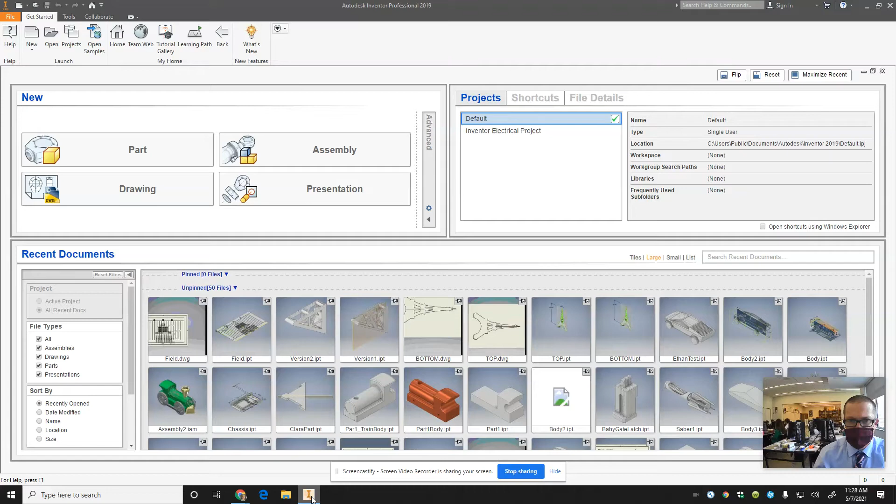All right, I'm going to show real quick how to go from your truss into Cura and kind of run through some of the basic settings to play with. So you're in Inventor. All right, you go File, Export, CAD Format. All right.

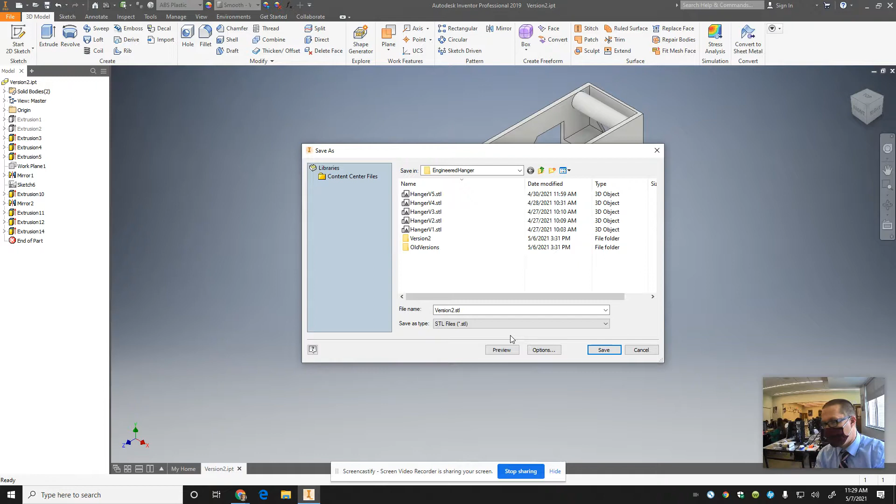Then you go down here to save as type, and you want to export it as an STL. Now, you want to check and make sure that your settings are right here. Most of you are probably all set, a lot of you, if you're on the same computer, but we've had a lot of shuffles. So the first time you export an STL file from the software, you got to check this. You go to Options over here, and then you've got to change the units to millimeter.

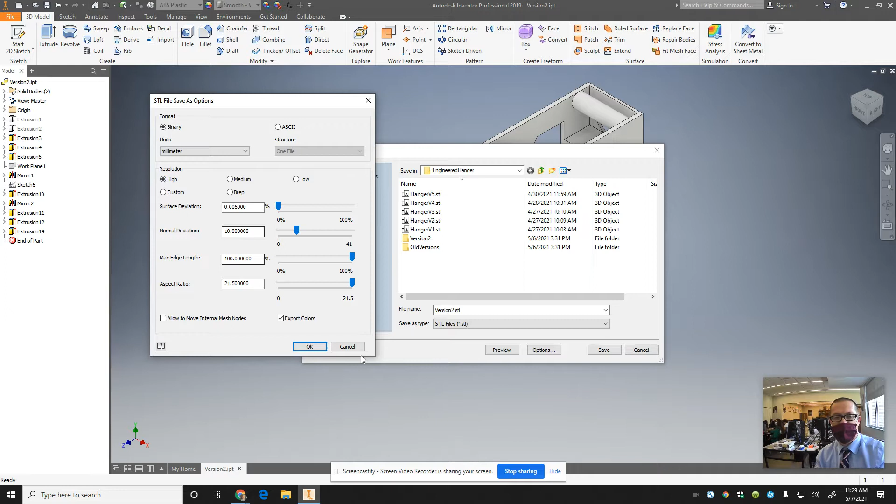You have to change to millimeter, and then as far as these go, I put it on high quality. There are situations where I don't want it on high quality, but something like this, it's fine to export it at high quality. You just hit OK. And then you save it. And save it somewhere where it's going to be easy to access.

All right, I'm just saving it in the folder where I always save stuff. This will be version 6 of that I've exported. All right, version 6. And hit save. All right, so now once you've exported it, you check those options, make sure it's STL, make sure it's in millimeters. Now you got to bring up the print software.

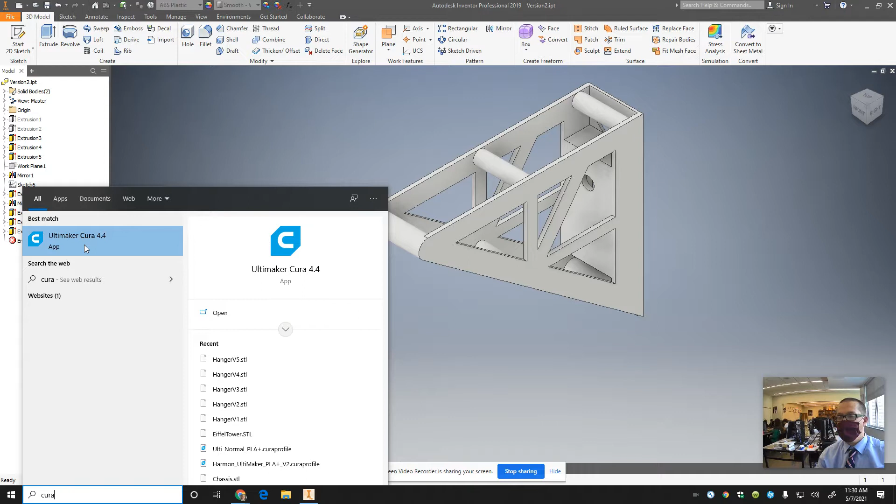So we use Cura, Ultimaker Cura 4.4. All right, so I just go down to the Windows search bar and type in Cura. I find it. If you're a full remote student, you should probably install this software at home on your computer, Cura, because then it'll allow you to see how much it's going to weigh. And these numbers are pretty darn close, actually. They're really not that far off of reality in the end. Because it knows the volume of material it's gonna push out.

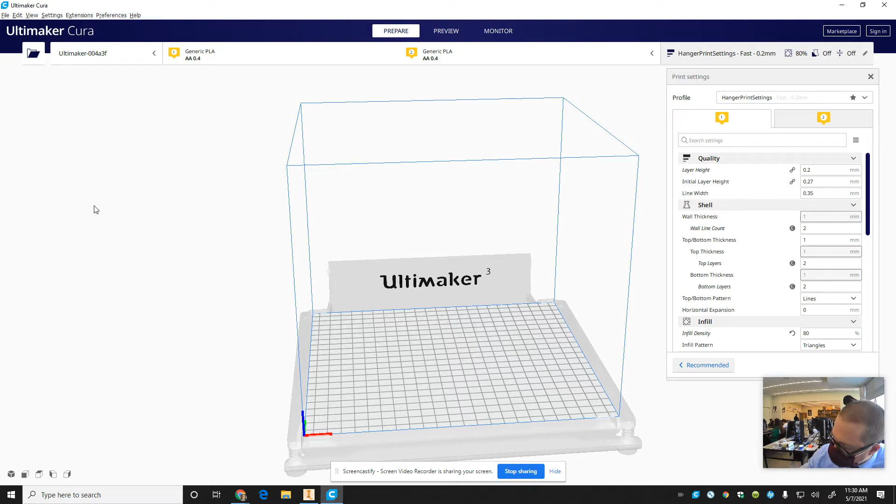All right, so when you first open up Cura, you're gonna see some pop-up windows, and just hit agree and next and next and next, and finally it'll want you to add a printer. All right, and when you go to add a printer, you get a window that looks like this. For some reason, I think some sort of security setting on the network changed. We can no longer find the Ultimakers on the network. So I click Add Non-Network Printer.

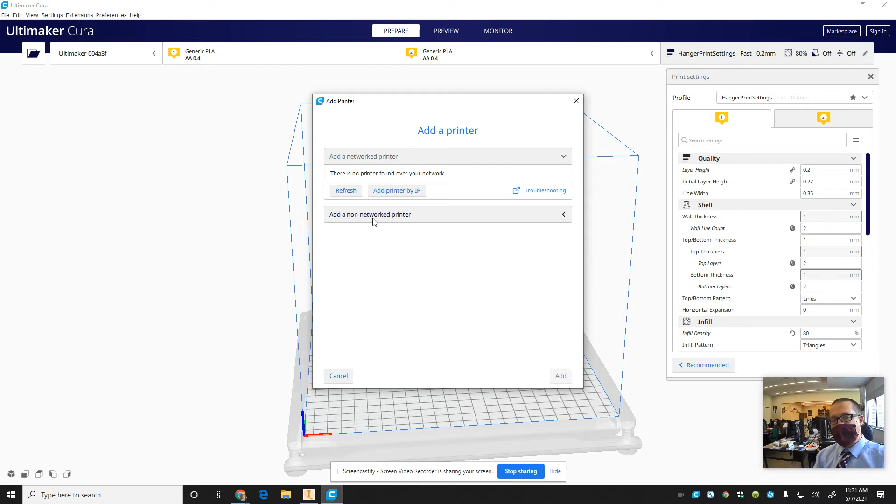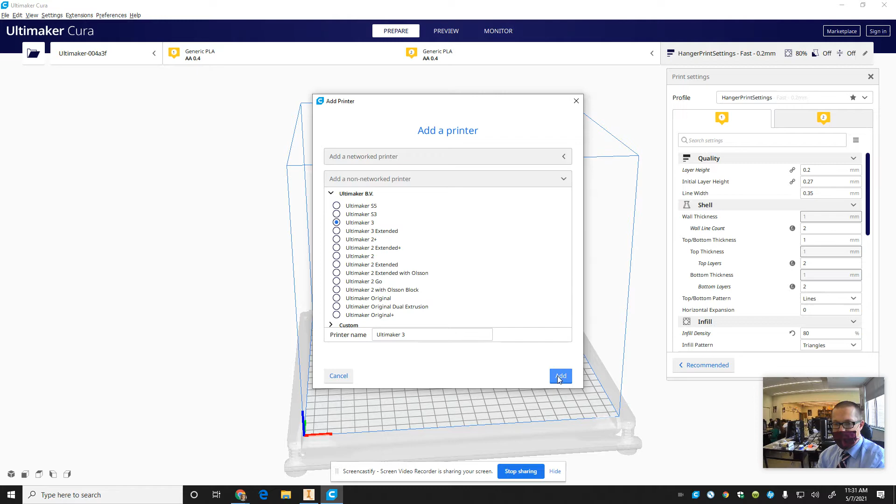The main ones we use are the Ultimaker 3, and then down here under Creality 3D, the Ender 5 and the Ender 5 Plus. The Ender 5 is the smaller one, the Ender 5 Plus is the bigger one. So I'm just going to pick one of the Ultimakers here. All right, the Ultimaker 3, because that's the one that's available right now. I'll hit add. You might have a pop-up if it's one of the others. Just hit next, and it brings you here.

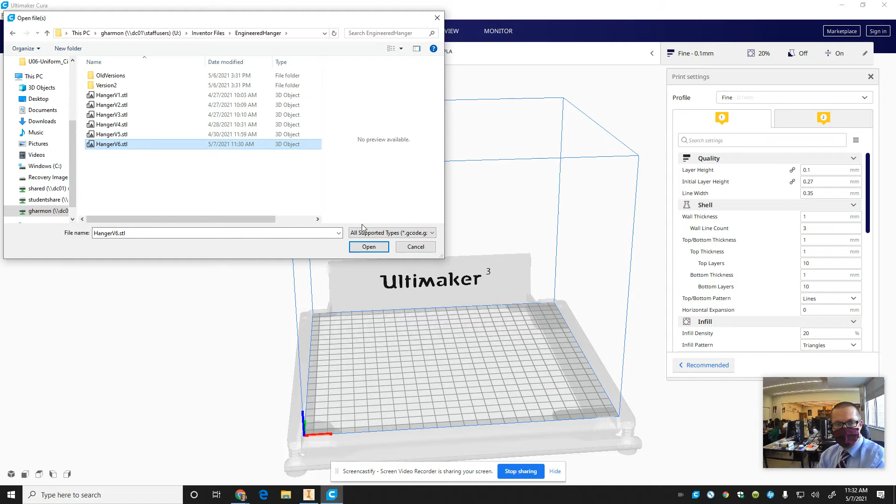All right, so once you get here, you've added the printer, you can open your file. So you click this folder up here in the top left corner, and navigate to your hanger. It's in your Inventor folder probably. All right, open it. I guess I didn't get it. There we go. And there it is.

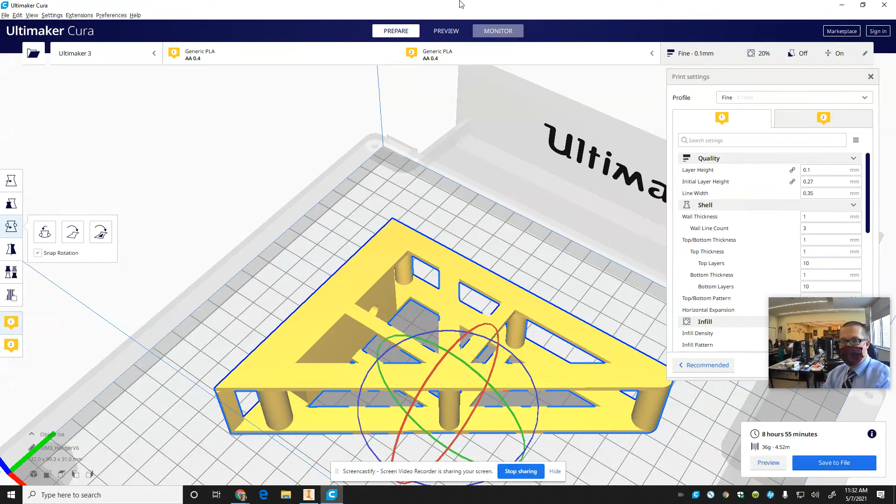Now, you're going to want to rotate it, possibly, right? Often it comes in like flat on its side, right? And that's not a good way to print. And I'll show you why. Over here in the bottom right, if you hit slice, this will process your model into the print file. You can actually then look at the preview of it. When you look at the preview, it actually shows you.

So a couple things with navigating that's useful here. If you hold down your middle mouse button, your scroll wheel, it lets you move the build plate around translationally. If you hold down your right mouse button, it rotates your view.

You can use the center and right mouse buttons to change your view, which is nice. Now if you zoom way in here, it's actually going to show you every single layer it's going to print, and I can see this is on fine.

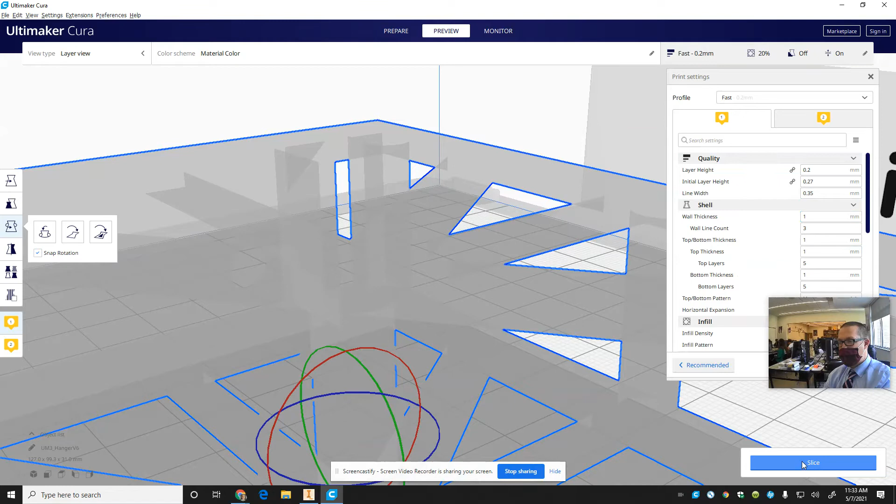You do not want to print on fine. So when you go to print settings up here, you hit a button that says custom, and it'll bring up all these other options. I'm going to change it from fine to fast. When you make a change, you have to reslice it because the software has to reprocess the whole print job. Alright, so now I can see the layers a little bit better.

Now these layers for the pegs are going to be super weak. The pegs will want to break right off immediately. So the sides will be the strongest this way actually. The sides with this would be great, right? But the pegs will be weak. So what I'm going to do is I'm going to rotate this.

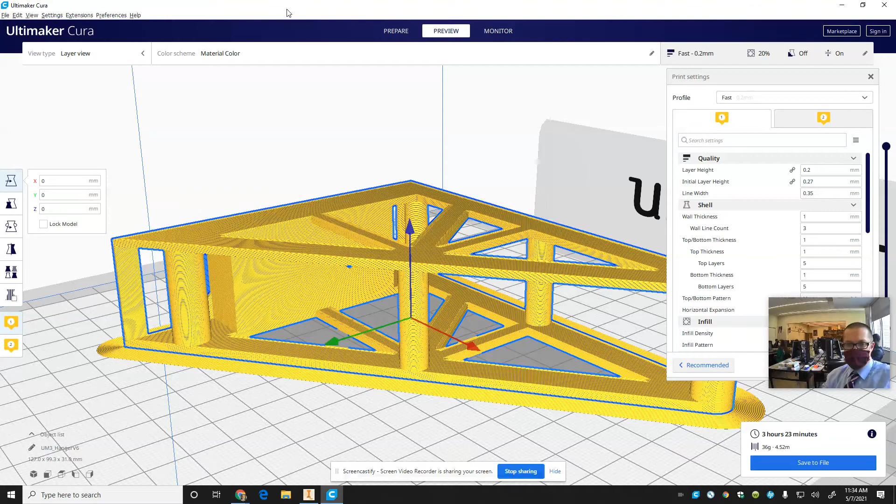Some people have tried printing the pegs separately and then sliding them in and gluing it together. I don't know if that's a great idea. I think it's better to print them solid. I have done it that other way, and I don't know if it's actually been helpful. Some people are printing it like this, with the pocket for the hanger face down. Some people have been doing that.

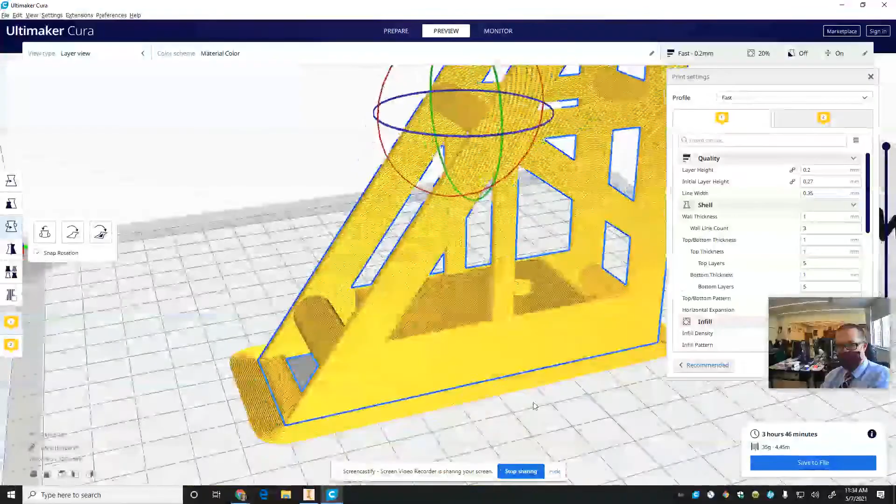Right now my mass is estimated at being 35 grams. You can go and actually turn off the build plate adhesion, hit none, and it'll get a more accurate result because it's not going to add that material in there. So 35 grams still—the brim that it was adding must have been less than a gram, so it didn't even affect the overall mass.

So 35 grams is what I have here, which I already know there's someone in here who's got one that's 30 grams, and if they hold the whole bucket and I hold the whole bucket, they're automatically going to win. So maybe I want to go back to the drawing board a little bit here, or there's some settings to adjust.

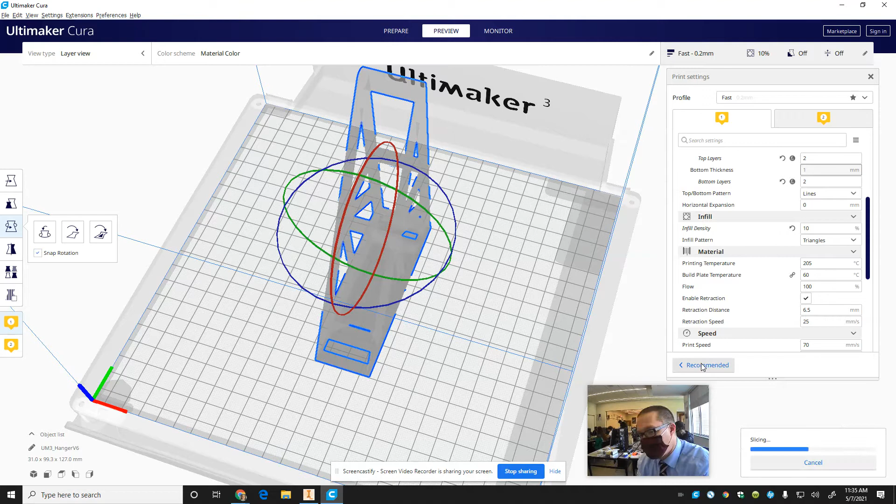What you can do is you can adjust the wall line count down. You can make that 2. Top layers, 2. Bottom layers, 2. You can drop the infill down. I'll try 10%, and I'll slice it. And when you do that, look, I'm down to 27 grams.

But look, you can look into your model now and see what it's going to look like. It's pretty hollow on the peg, so maybe that's not a great strategy. Maybe that's not a great strategy.

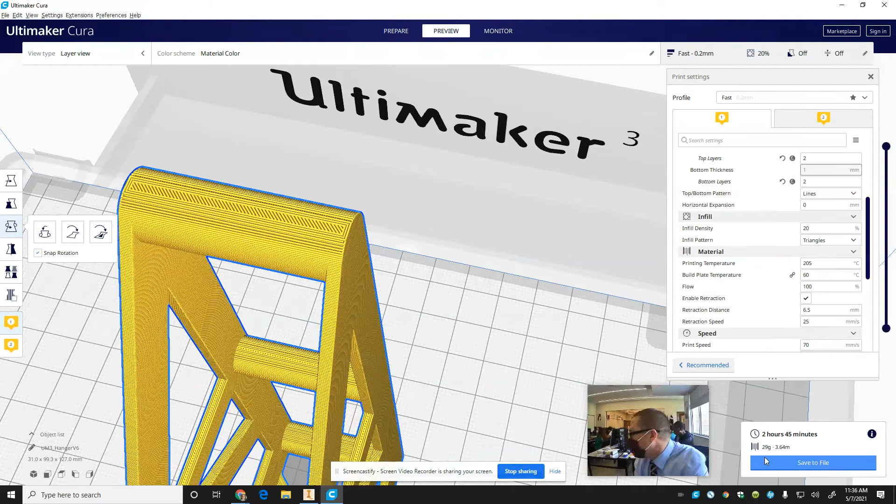Maybe I want to make the infill higher. So let's say if I go back up to 20% infill, but with 2 wall lines and I slice it, let's see what that gives me. 29 grams, only 2 more grams. But look, there's a lot more material in the pegs to make them stronger, so that might be worth it.

So to get to this view, you got to hit the preview after you slice it, and this part's going to be up to you what you want to make the wall line count. Maybe somebody wants to try doing something different.

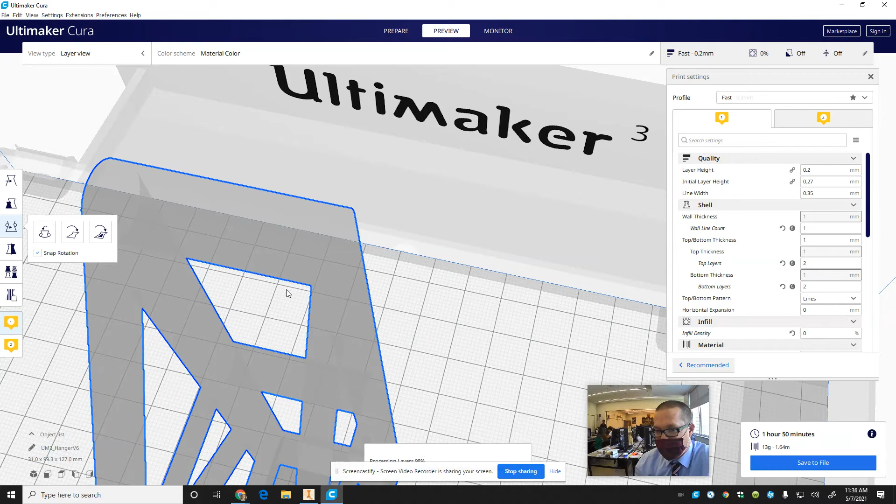Actually, Zach Mendesis, when he did it, he tried doing 1 wall line with 0% infill. He made it super thin, literally one layer thick with no infill. It's only 13 grams, but it's probably not going to hold too much. You know, that was his ticket.

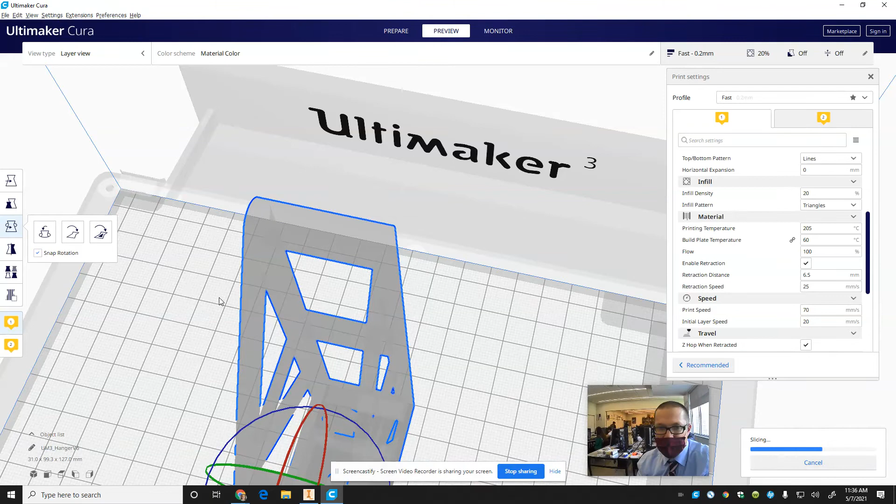Maybe if you add a little infill to that, so you can mess around with that. I'll let you do what you want to do there. Okay, I guess I got to come around and check your computers and such.

See that? Infill is there, only 1 layer thick, 24 grams. Maybe I want to try that. I don't know, that's going to be up to you.

All right, well, there you go. That's how you get your mass estimated.